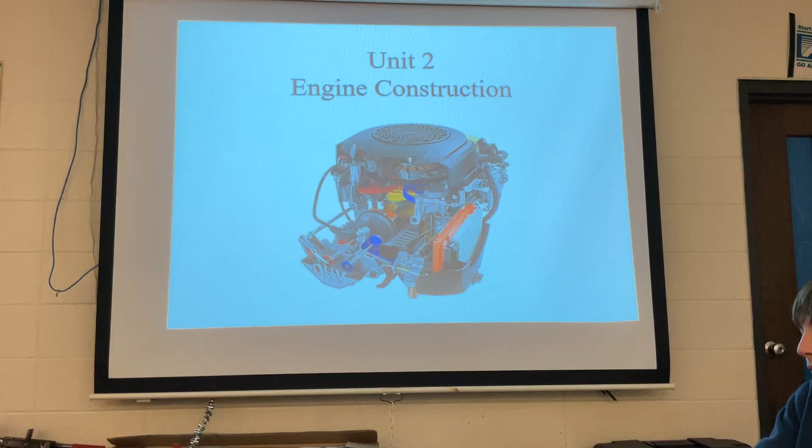You had the picture that looked like this. You're gonna probably have to kind of follow along with me because I'm gonna end up sketching stuff up there, and I'll end up being kind of all over the place. But when you guys had this picture, first and foremost, I try to cover parts and basic motor components. With that, you start to learn terminology.

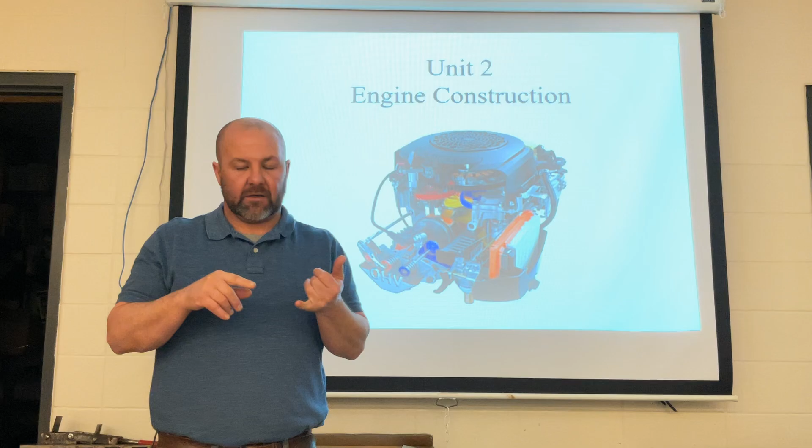Then we jump into tools, and I show you a couple little presentations about tools. There's a quiz on like 30 different tools. Not because I don't think you've ever used them, not because I think you're idiots. Honestly, a lot of it's going to be a review for you. If you've ever turned a wrench, if I told you right now go grab a vice grips, you'd know what you're looking for approximately. If I tell you to grab a Phillips screwdriver versus a flathead, or say something about an Allen wrench, you're gonna know I'm speaking of a hexagon-shaped tool as opposed to some guy named Allen. Got it? Makes sense? A lot of this stuff is going to be review, but that's our baseline to make sure everybody's kind of on the same page.

Yesterday was bad luck, I had to go take my dad, run him back to the hospital. So that's why we didn't go through this yesterday. I fully intended for the stuff to be ready to go for yesterday.

But what you saw here on this sheet is very similar to what I'm going to throw around. You guys keep this, I want to keep one. Get one to William if you would please. This is a PowerPoint that walks through roughly in different looks than what these 14 are, but it kind of gets you along the same line.

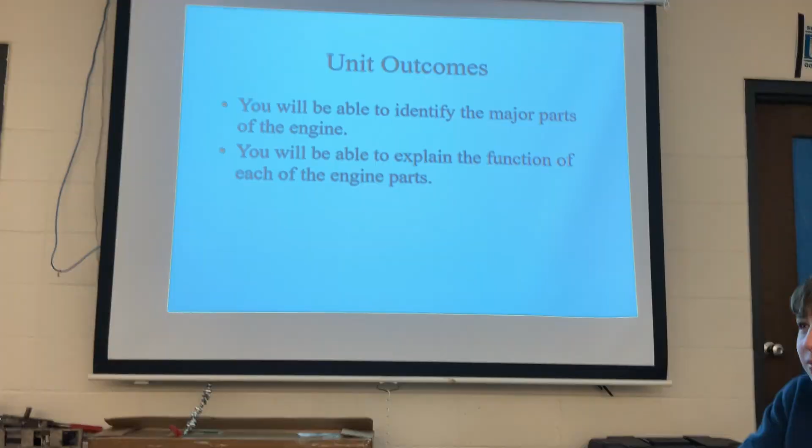I wish that... does Kayla, anybody in the school have a projector? Yes, close up on Kayla. Love it. Do any of the other teachers use the clicker that automatically moves forward? Yeah, people have that. Should ask Mr. Bush for one.

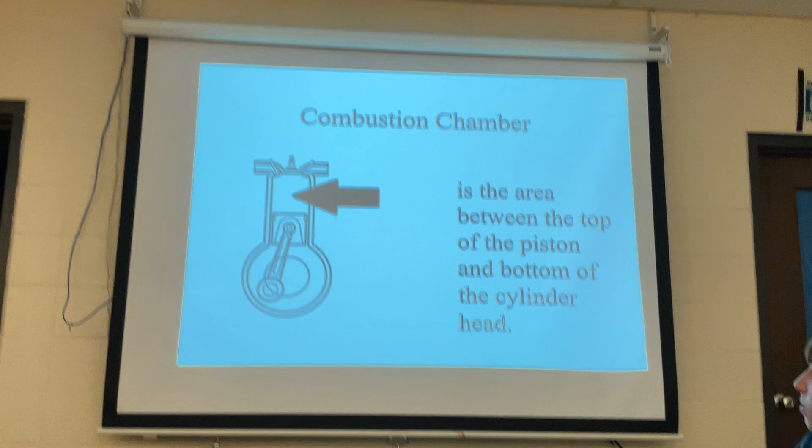When you're done with this, you should be able to kind of identify the major parts of an engine and the functions of some of them. You're not going to get a ton of them. Okay, gentlemen, take a look at that sheet in front of you. That sheet is showing the piston at top dead center. Top dead center. You're going to hear that, and you're going to see this that I'm going to talk about at different junctures throughout the year.

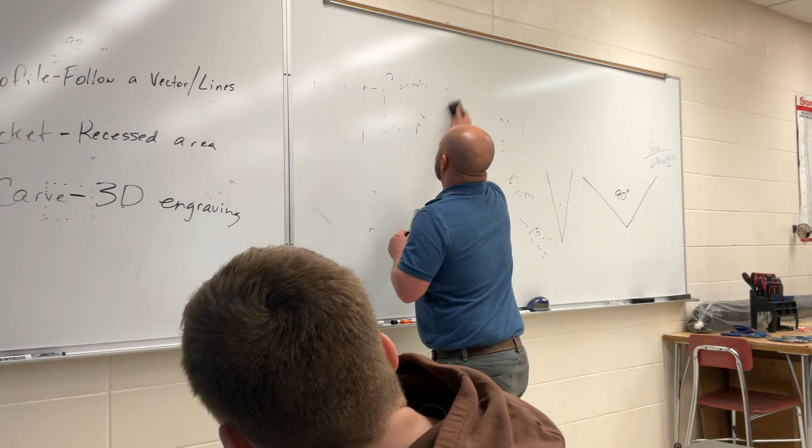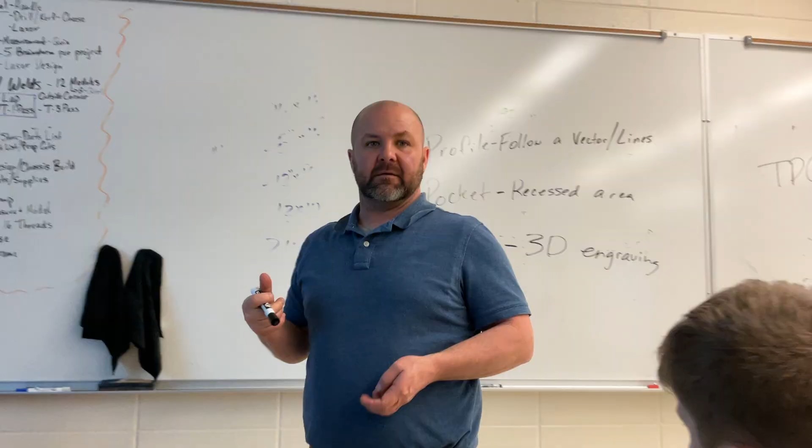But TDC, you ever see that acronym? What do you think that's going to mean? TDC, what do you think that means? Top dead center, top dead center. Good job. Who said it? Kevin, congratulations, nice job.

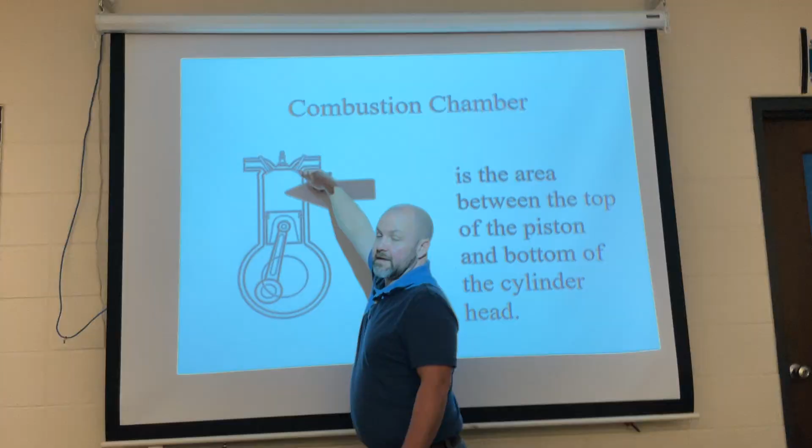That's top dead center. What do you think that one is? Bottom dead center, bottom dead center. Thanks, William. Point being, ladies and gentlemen, that's as low as the piston can go and as high as the piston can go. That's what top dead center and bottom dead center mean.

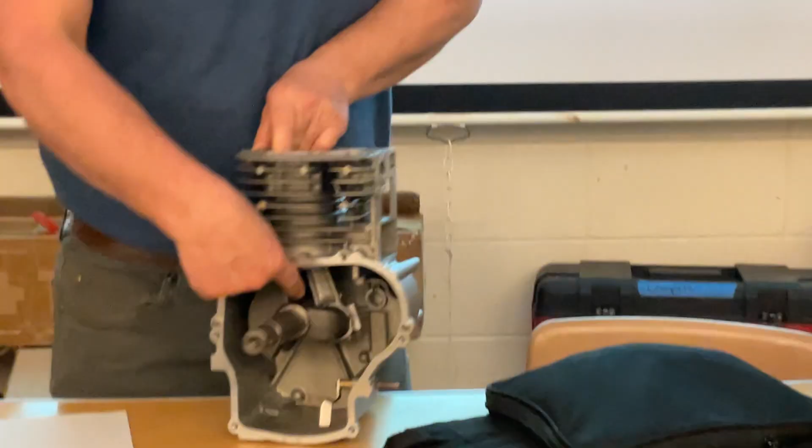Everybody take a look at this. This is a good illustration to kind of show you what's going on. Right now that piston's coming down, and this is called a connecting rod. Let's look at it, here's the connecting rod. That part is the connecting rod. That piston can go up as high as right there, you guys see right there where it reaches as high as it can go. Okay, that's top dead center.

And then when it's all the way down here, actually the easiest way is just when it's in that perfectly vertical position, that would be bottom dead center, as far that way as the piston can go. Which now ties us to, if we look on the sheet, you guys might wanna just make updated notes as I go along. You might wanna grab this sheet, make updated notes as we go. But what is number one? Actually, I think it's in here, I'm not gonna jump ahead yet.

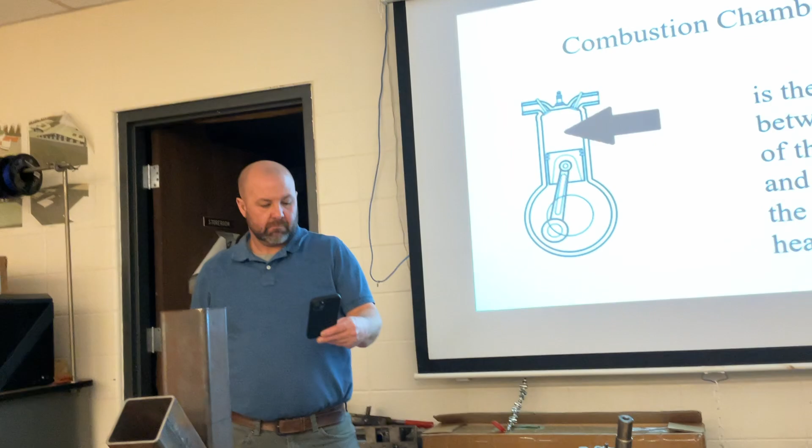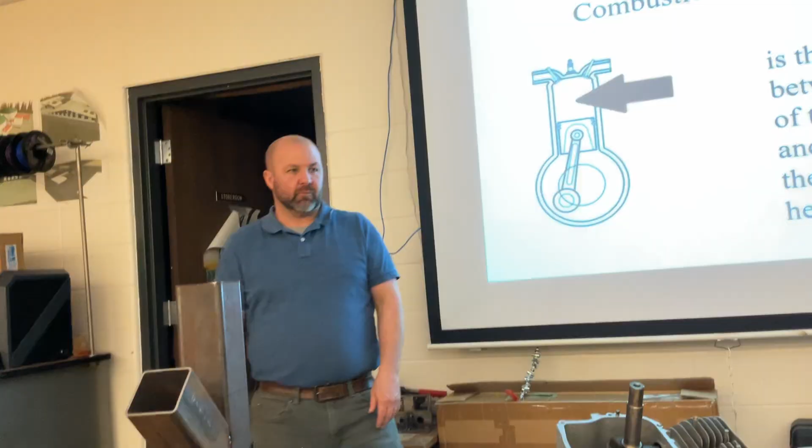Okay, so gentlemen, this isn't on your sheet. Combustion chamber. A combustion chamber, what do you think happens in the combustion chamber? Combustion. Weird, rocket science, right? What's combusting? Burning. Say that again, Kevin. Burning. Exploding. Oh, combustion is burning, right? Okay, when fuel is combusting, that's talking about burning.

There's burning going on in there. So what's in there that burns? Gas. Most of the time I refer to things as fuel, okay, because there could be diesel, there could be propane, there could be gasoline, and then that ties us into mixed gas and unleaded gas, regular gas.

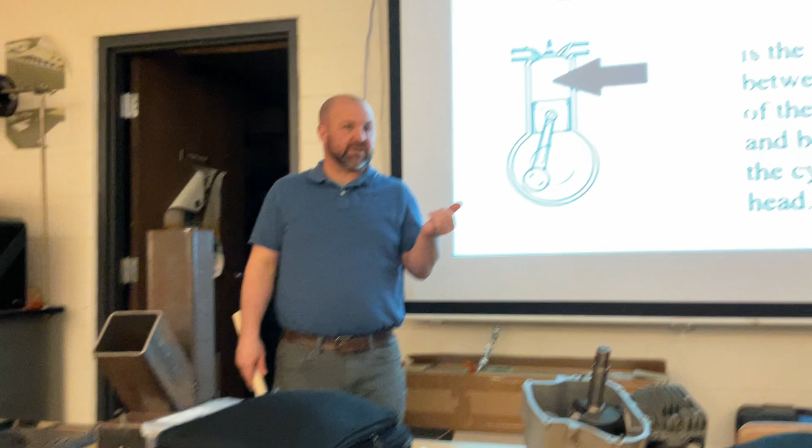We'll talk a little bit about differences, but largely, gentlemen, the premise is the same for almost everything, okay, whether it's diesel, that gets a little squirrely, two-cycle engines where you have to mix your gas, that gets a little squirrely. Most of everything we're talking about, at least for the basic premise, is four-cycle, four-stroke. When you hear somebody say four-cycle, this is a common misconception, people think four-cycle and four-stroke are different, they don't realize those mean the same thing. So if you hear somebody say two-cycle engine oil or a two-stroke engine, those are the same things too.

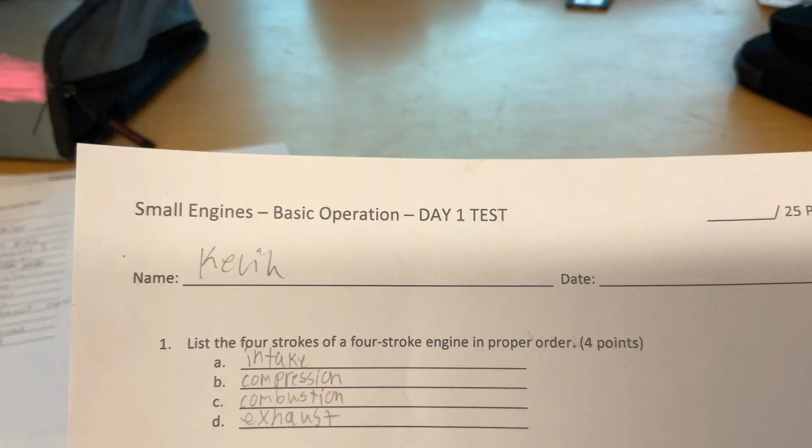Everything we're talking about right now is four strokes though. If you look at the pre-quiz I gave you, your first question is list the four strokes of a four-stroke engine in proper order. We're going to talk about those today or tomorrow. But yeah, combustion chamber, you hit the nail on the head.

Things are combusting. I wanted to talk about what's going to be combusting in there very shortly, but I'm going to move on, otherwise we're going to just talk about the whole thing and leave it on the same slide. Okay, engine blocks.

I told you the other day, this is like number 7 on here, that this could be called a crankcase, this could be called a cylinder block. This entire casting, you guys see this is all one piece, all the way through, it's all one piece. It's not like multiple pieces bolted together. That is one cast piece, and then this gets machined off to tolerances, that gets machined, all these things get machined and drilled and tapped. Makes sense? Fair enough?

So on a small engine, that's all one piece. That's your cylinder block.

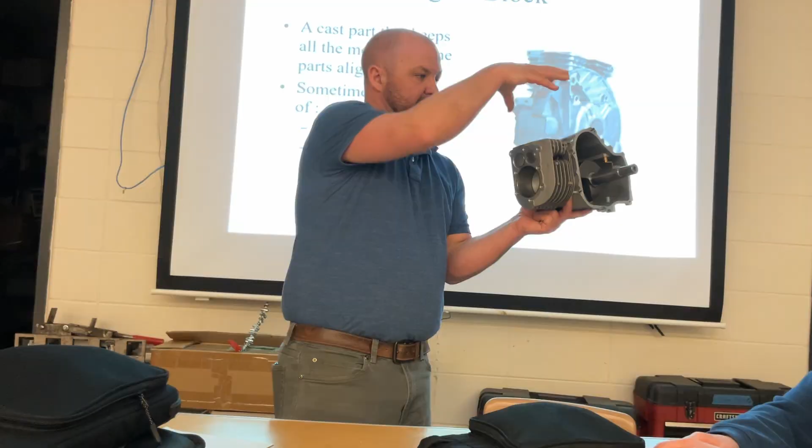When your connecting rod breaks, have you ever heard of an engine throwing a rod? Have you ever heard that term, that it threw a rod? Here's what that means: that means this broke, and usually what it refers to is it blew a hole in the side of this.

Why did you look at somebody? Did it happen to a four-wheeler? Yeah, it happens. Is that something you can order a new part for?

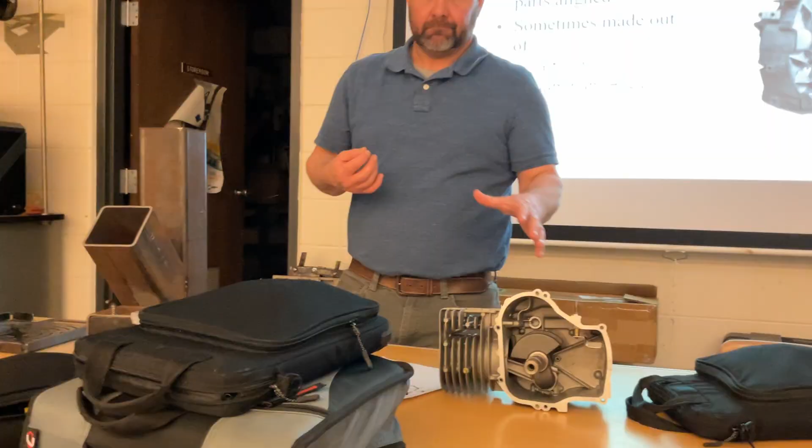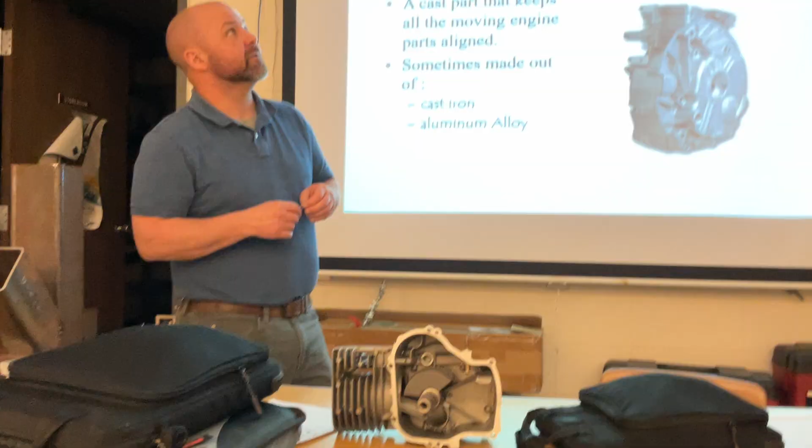Largely not, it's not a part, we're talking about that entire casting. So if that happens to, say, a four-wheeler or a snowmobile, whatever, you're looking at an entirely new engine block, and it may be cost prohibitive to explore your options with that. You may be better off to just buy a new motor. In other instances, you can find ones with other broken parts and pieces, use them as a donor, and then you wind up taking this with your other components and bringing it together.

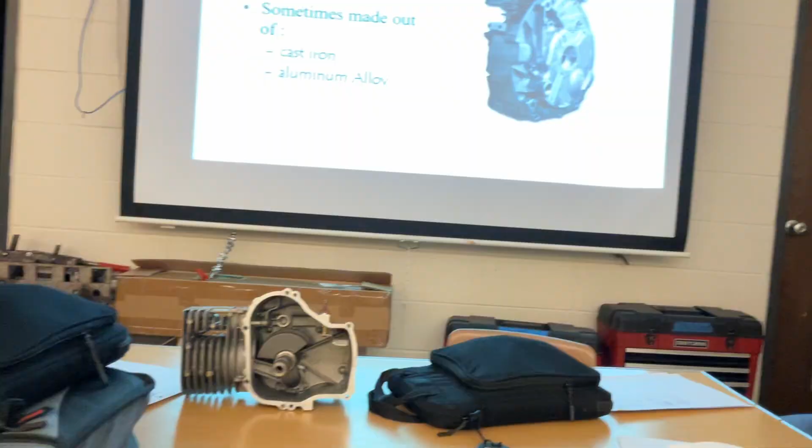But when we talk engine block or, alright, I don't have it on this motor, but the cylinder heads, when we're talking about heads, trying to find...

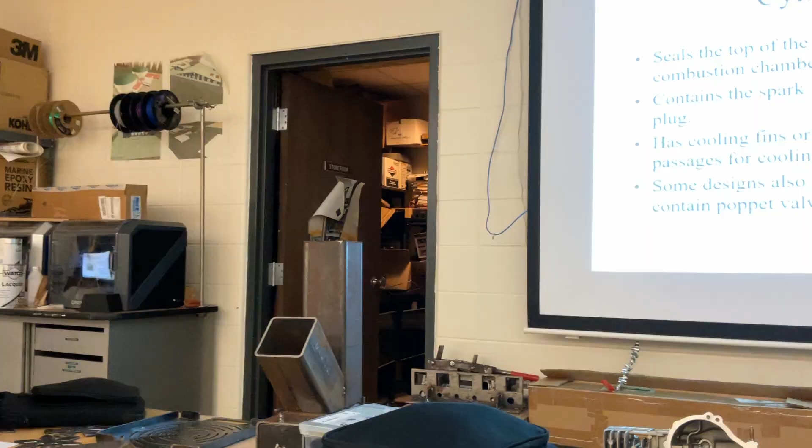Randomly through this, you're going to see me just sneak into this room, steal some things, bring them back, and that's that.

This is what your cylinder head looks like. Okay? Everybody thinks of this motor as operating pretty much like this. Anybody know what this motor is off of? Anybody got any idea? Lawnmower. Tiller? How do you know that? I just guess, the smaller one. He's right, okay, lawnmower, could also be something similar off of this.

Could be a rototiller, definitely, something in that caliber. If this was a rototiller, usually it's going to be mounted such like this. The recoil part where you pull would be over here, and that's this part. That's where the flywheel would attach, is on this taper. And then back here, there would be a pulley that's attached. There should be a keyway on here, see that little teensy keyway? There'd be a pulley that attaches to it.

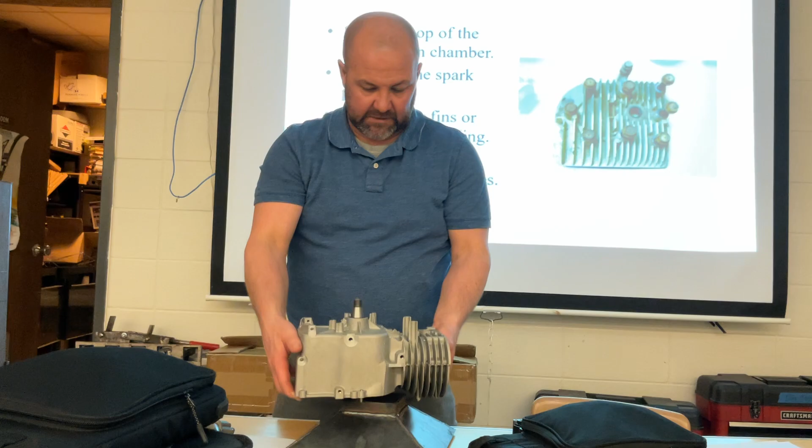And then that'll turn some kind of a belt, okay, so it would operate something in that vicinity if it was on a walk-behind rototiller. But I can tell you this motor is almost exclusively, yeah, it is a walk-behind lawnmower, and it's in this position. Remember what I just told you earlier, top dead center, bottom dead center? Is this now the top and the bottom, when that piston goes that way or this way?

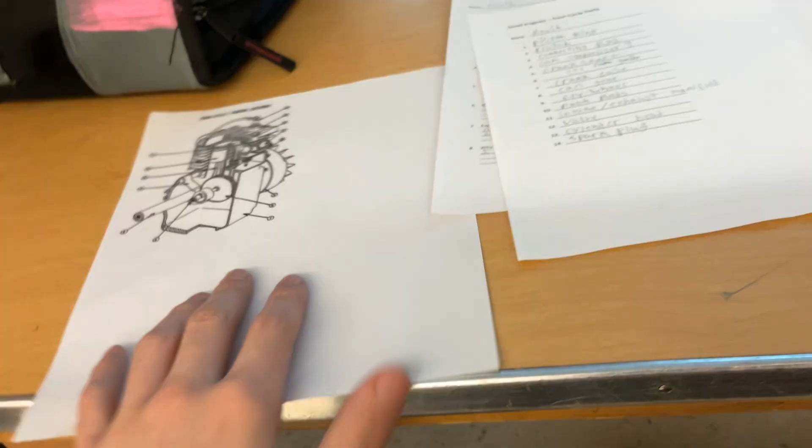It's kind of like right or left, or whatever - I need to stress this. This same motor mounted in this vertical position, or laid on its side, this is still top dead center, this is still bottom dead center. It's just how far the piston goes this way and how far it goes that way.

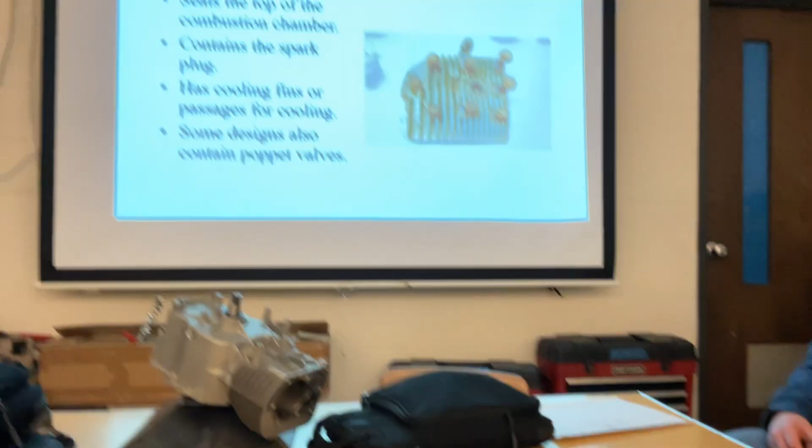Make sense? Questions? Everybody take a look back on the screen. You're going to hear me talk about this throughout the quarter. I know you didn't sign up for a class to sit here getting lectured with PowerPoints. You won't - in about a week or less we'll start wrenching. But we have to go through basic parts and basic tools first, then we start wrenching.

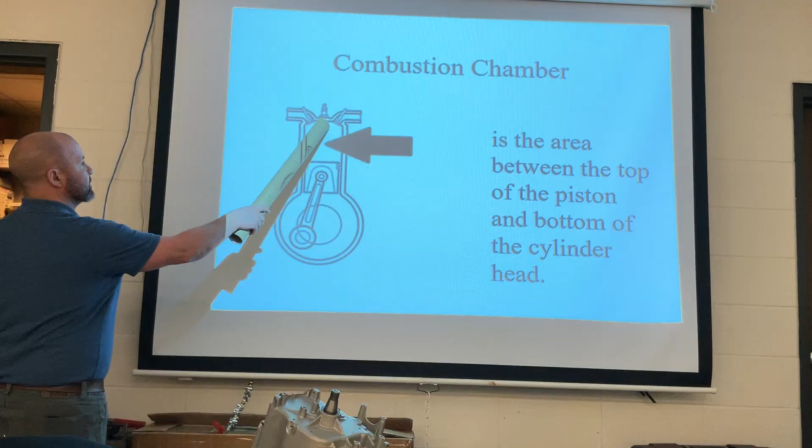What kind of motion is this when the piston goes up and down? That piston is going to go like this again and again and again. What kind of motion is that? Vertical - close, you're close. But imagine it wasn't straight up and down all the time, and sometimes it went horizontal. Circular - opposite of circular. Starts with an L. Linear. Linear motion, okay? This is linear motion.

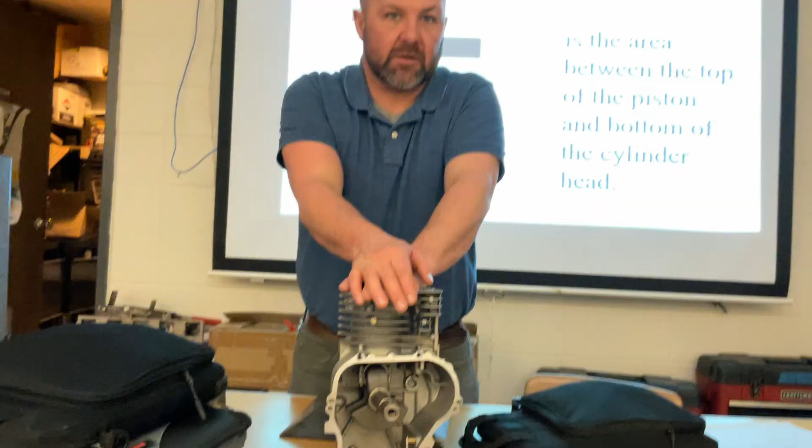Okay, what are we outputting? Gentlemen, this piston is linear - it's going up and down in that cylinder. And it is turning into what? Rotational force? Circular motion, right? That's our output.

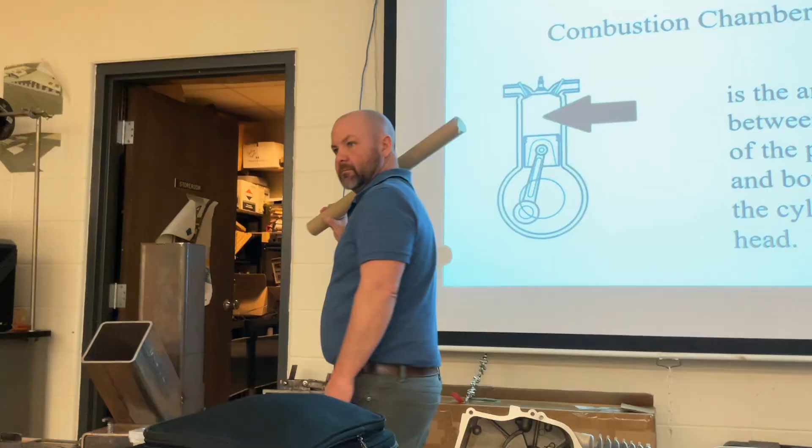Think of a tractor. What powers a tractor? Normally it's circular motion, either turning gears to turn the wheels, or - what's on the back of a tractor? PTO. What does PTO stand for? It's an acronym - power takeoff. And what kind of motion is that? Circular, right? Again and again and again.

So gentlemen, here's a little light bulb moment with mechanics - with mechanisms in the human world, we use a fuel to burn here. What happens when a fuel burns? It combusts, it produces heat, it creates pressure. Why does it create pressure?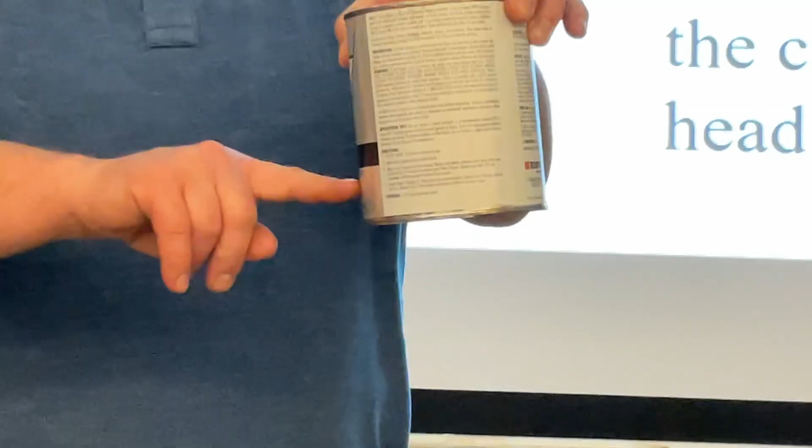I fill this can this far with gas, okay? I pound this lid back on, I have a wick in here. I light the wick and I run. What's gonna happen? Why is it gonna explode? Because of pressure - because the gas needs to escape somewhere. Why? It expands. That's what I need you guys to grasp right now.

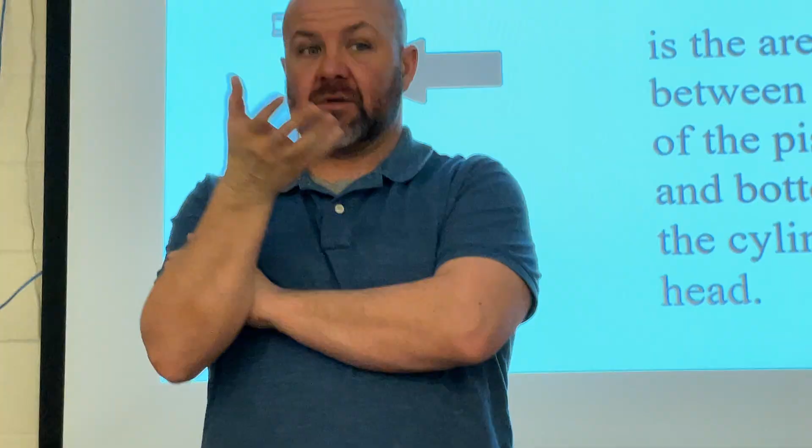It doesn't just magically create pressure, it doesn't just magically explode. I can dump gas on this floor and light it on fire - is it going to go poof? No. Unless you put a crap ton of it. But if you just put a small Dixie cup of gas there and lit it, if it's not contained, it doesn't actually blow up. If you've ever seen fumes travel and burn on the ground, that's what's happening - it's not being contained, so it's not combusting and causing that pressure. It's just combusting in that it's burning.

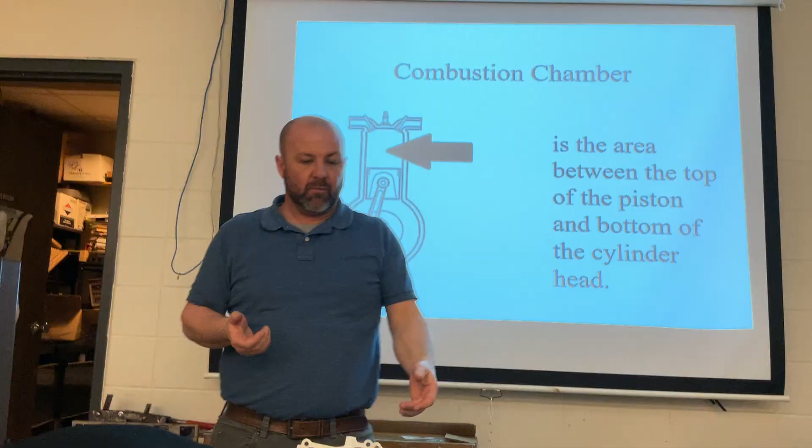Fair enough? Questions? Okay, so what's happening here - a fuel is put in and some kind of spark is put into it. When that spark happens, it combusts and it expands. Is there any more room right now? Okay, right there - what's happening is this piston got all the way to the top. You gotta turn it a little bit because now it's stuck, it's all the way to the top. And then what happens?

Then what happens is that fuel and air ignites. And when that fuel and air ignites, it pushes this down and it goes boom and blows it all the way to the bottom. Make sense? That's what's happening, in a nutshell.

How many times does that happen? Very, very rapidly. If you've ever heard the acronym RPM, what does that mean? Revolutions per minute - so that's talking about how many times in a minute this thing is revolving. We're going to talk about how all this terminology and parts are so interconnected, and I want to cover that early in the course. So that's our combustion chamber - and now we've talked about expansion.

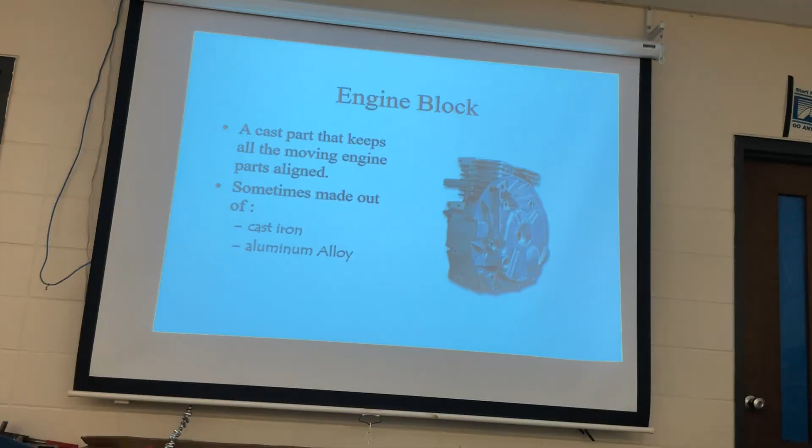Cylinder head is that part up top. It bolts on top, over the cylinder. Okay, what's a spark plug? Spark plug looks like that.

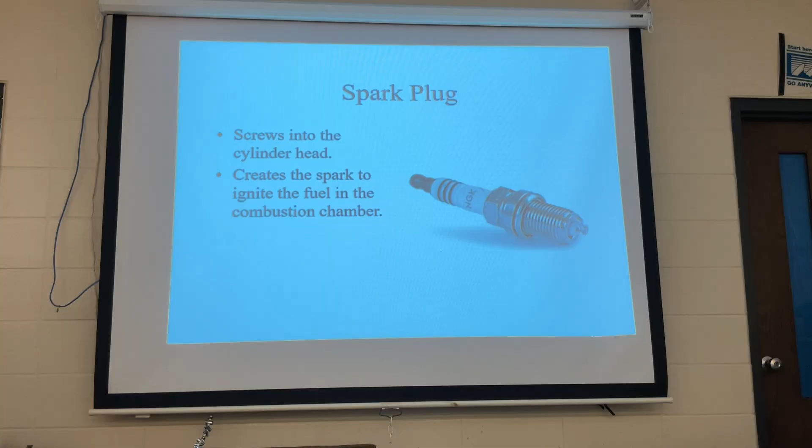Everybody seems to know, I guess I'm not. If you don't know this, that's fine, you're not a bad guy. It's very common sense for a lot of people that a spark plug creates spark to ignite fuel, right? Okay, why else would we have a spark plug? Well, it creates the spark.

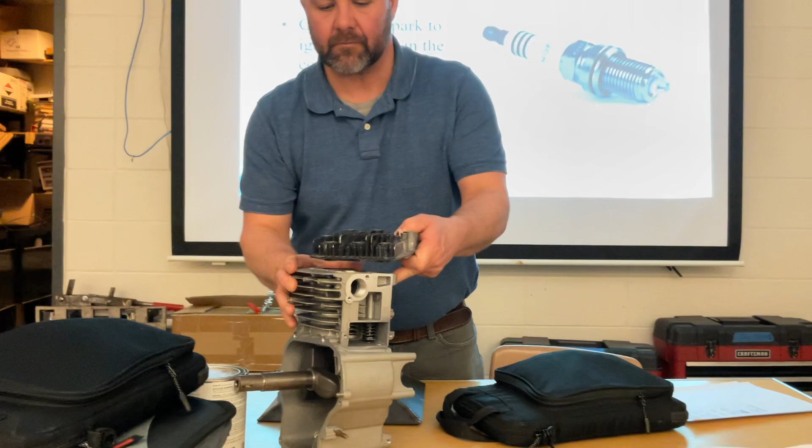So what happens, gentlemen, is this cylinder head goes on here like this. There's a spark plug that goes in this hole in the center. You can see these two cutouts, these are for our valves, and it allows release so the valves can come up and down, raise and lower. This isn't the right cylinder head for this motor, but it's close enough to depict what's going on.

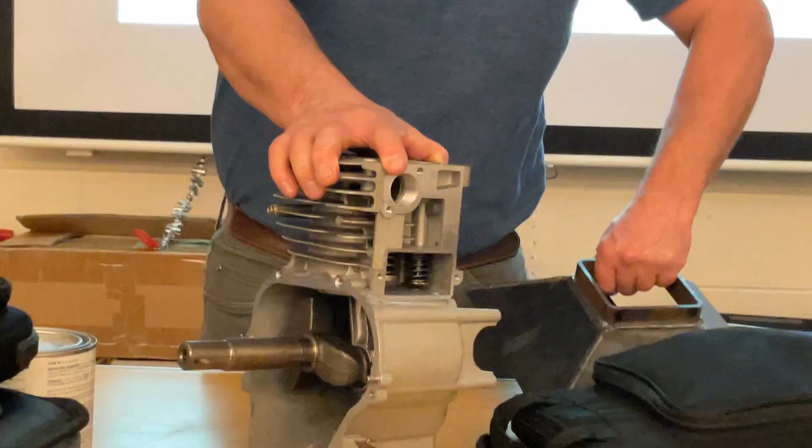So what's going on here is that spark is right there, and these valves... I gotta get where you guys can all see. Maybe we'll scoot that back a little. Okay, I'm gonna point this out for everybody. Can you guys see this port?

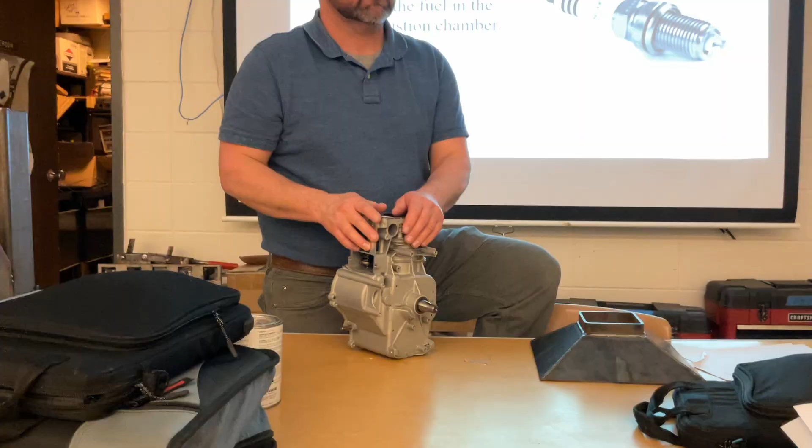This port is connected with this valve, and this port is connected with this valve. So here's how it works. There's two valves. Anybody know what those two valves are? Intake and exhaust, okay? So think about breathing, think about if you had to breathe in just through your nose and breathe out just through your mouth, or vice versa. That's how it works.

I don't know if these valves... no, there's no cam gear. Nothing's gonna work. But as it's going, come here. Can you guys see well enough? So here's what's happening. I'm going to start this thing, okay? I put my choke on.

When I put my choke on, anybody know what the choke does in a carburetor? It limits the amount of air and increases the amount of fuel, so it's richer, you're right. Let me see if I get a carburetor handy. I don't know if I do or not.

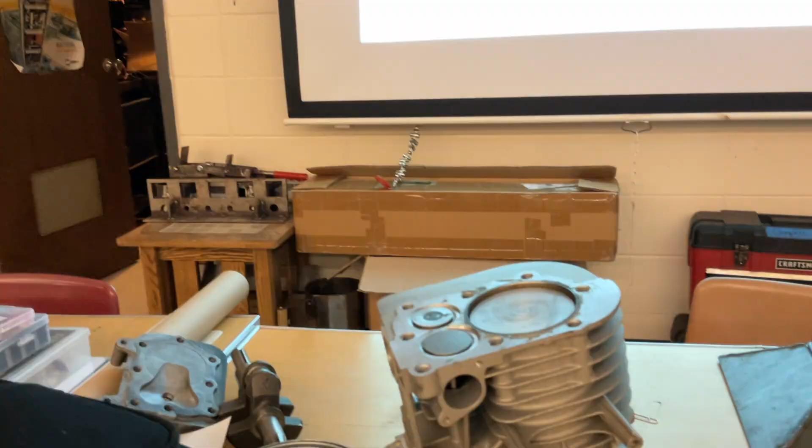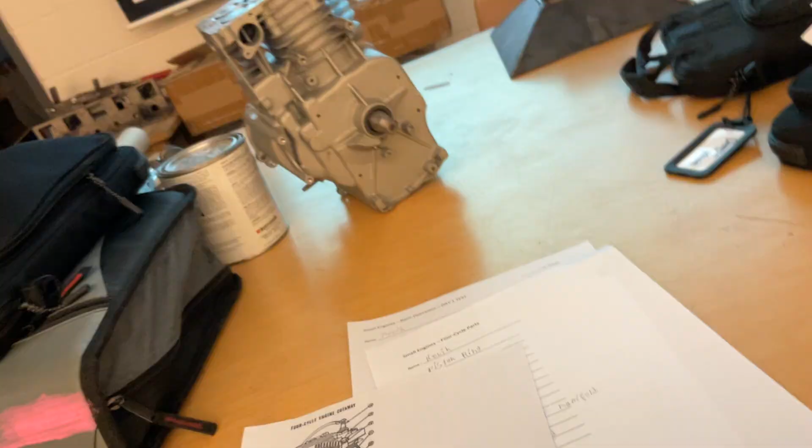We'll jump into it when we get into the carburetors more specifically, but here's what happens. There's three things needed on your... this sheet.

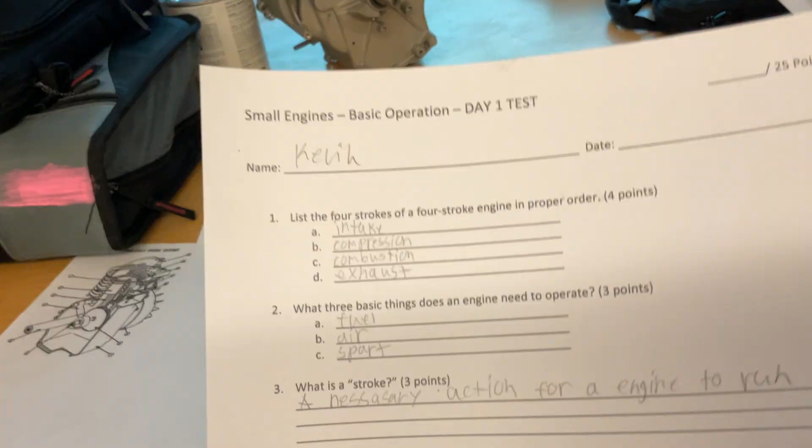Your second question - I said the 4 strokes is the first question. The second question is, what 3 things does it need to run? What 3 things does your motor need to run? You're gonna hear this from me. If today is the first time, you're gonna hear it another 20 times in the next, I don't know, 16 weeks that I have you.

What 3 things does your motor need to run? I don't care if you know it or not, but I want you to try. What do you think it needs to run? Okay, fuel. What else? Spark. It needs something to ignite the fuel. What's the last one? Air. Does it need compression? Does it need all these things? Yes, but these are like the 3 basics, right?

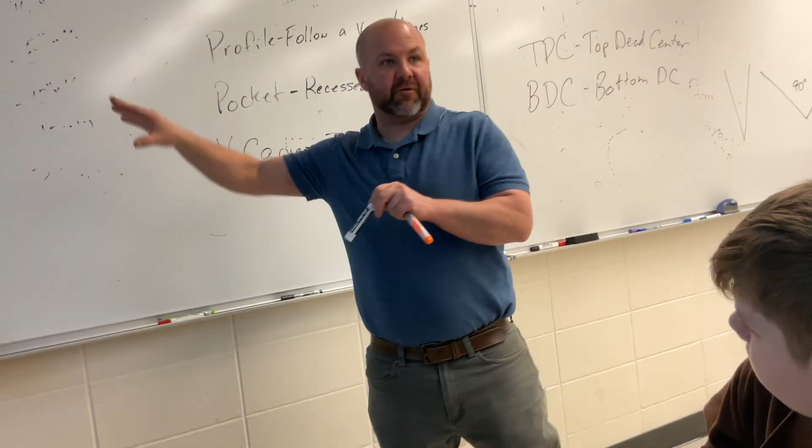If we take out and blow a hole through the side, like if you were to drill a hole into your combustion chamber and it doesn't have compression, then yeah, Reed's absolutely right - then you need compression and all these other things. But those are your 3 cornerstones.

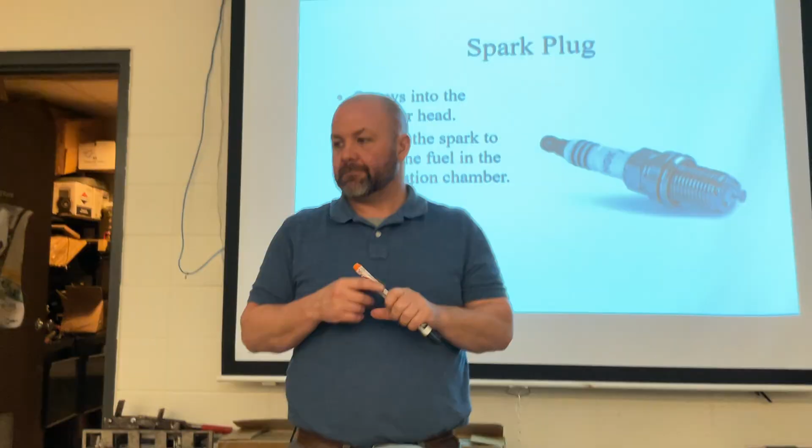Deegan's gonna bring in a motor. He's gonna say, yeah, it worked - I don't know - it worked last October and now we can't get it running. What are we gonna check for? We're gonna check that it gets spark. We're gonna check that it's getting fuel, okay?

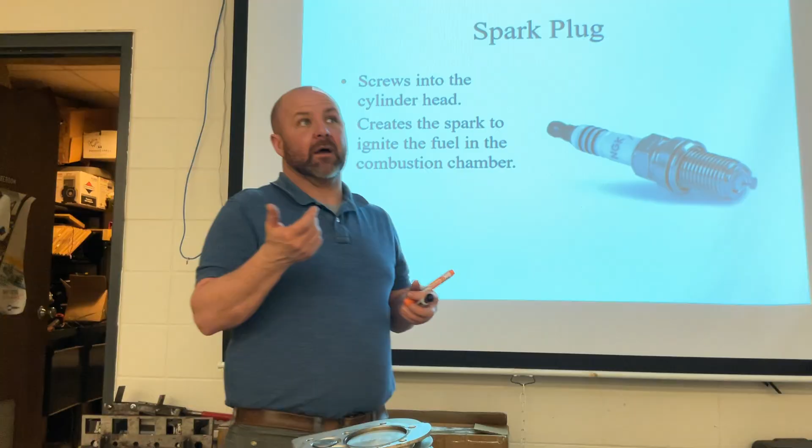Is the fuel filter plugged? Is a line pinched off? Is your gas tank rusted out on the inside? Things like that would cause it to stop feeding fuel. And then lastly, we check your air filter system to make sure there's not a mouse nest or something that would block pulling in air, okay?

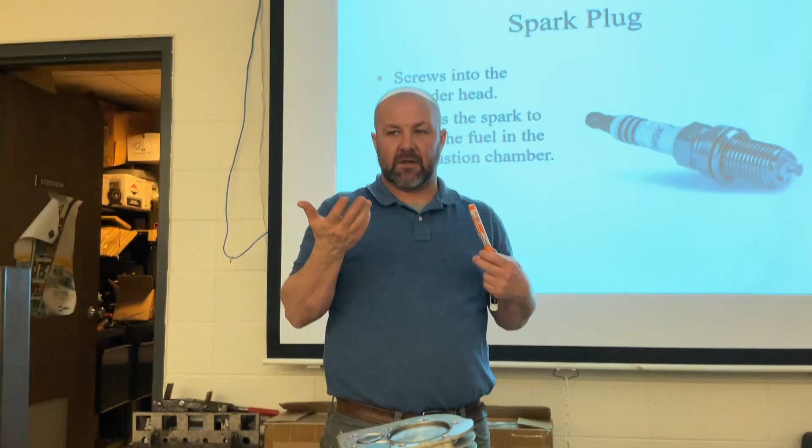Think about it like, you guys remember COVID? Were you guys all alive during COVID? Yeah? How old were you? 4th grade? 3rd grade? What grade were you in? I think I was in 3rd. Do you remember when you went back to school? Remember when we got shut down in March? And then we went back to school the following fall? What grade were you in?

I'm in the 5th grade. Third grade? Okay, so give or take third grade. Some of you are sophomores? So you would have been a fourth-ish.

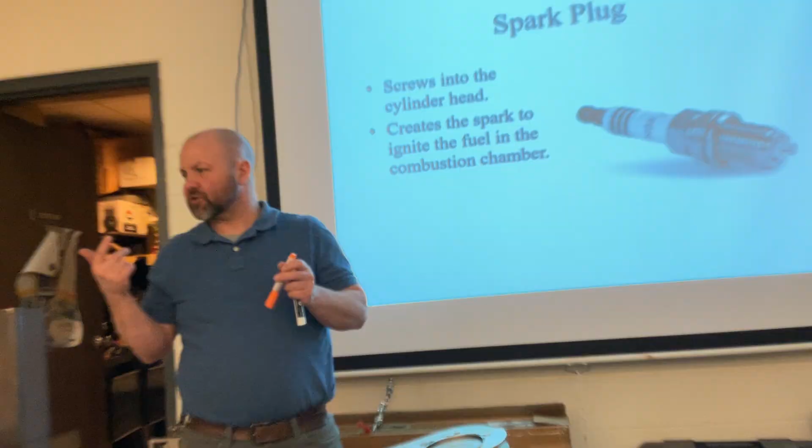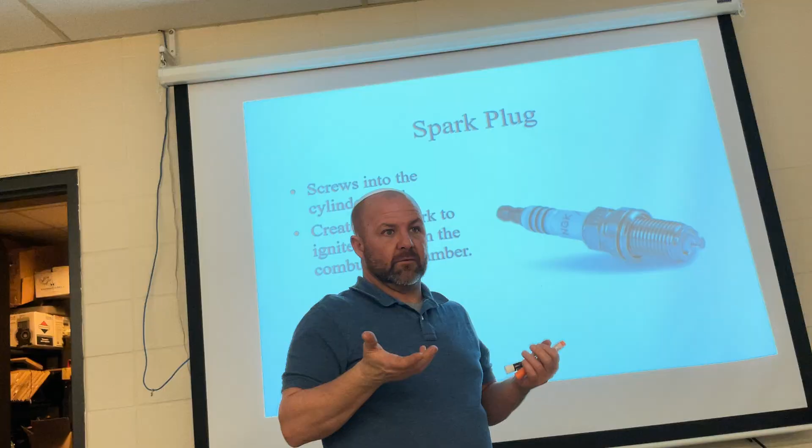Do you remember having to wear those masks in Phys Ed class? Remember running around and getting short of breath faster than before? Next year when we came back, students had to wrestle, play basketball and football with masks on. You physically got less air because you're wearing a mask and breathing through that, right? Same thing can be said for your motors.

If you cover up that air intake, it's not going to run at all or as well, okay? So those are the three things that are needed. Spark plug, we'll talk about when and why it fires at certain times, but in a nutshell it's there to provide spark.

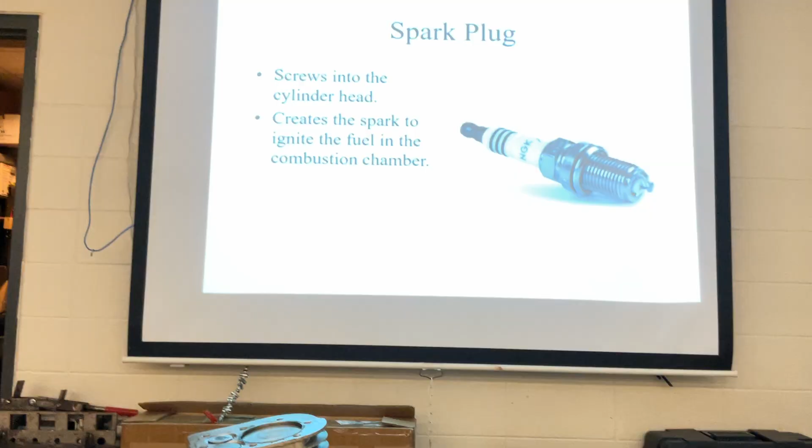Where does that electricity come from to provide that spark? It comes from the battery, right? Come from the battery? Stator or what? It does. It's called a stator or a coil, magneto, depending on which style of motor we're talking about.

That's a misconception I want to dispel right away. Some students think, oh, it's got a battery, like I go out to my car and turn the key, and the battery juice goes to my spark plugs. It doesn't. On a car, the alternator is sending electricity back—actually, the alternator is recharging the battery, it's a little different on cars. But I need you to know it's not electricity from your battery sending over to your spark plug. We'll talk about those later a little more.

Okay, valves. We alluded to valves. This motor, how it works, is when it gets to a certain point, this valve opens up and it sucks air and fuel in this port, it goes up and comes out around this valve. That valve pops up and allows air and fuel to come in here, and it sucks it down.

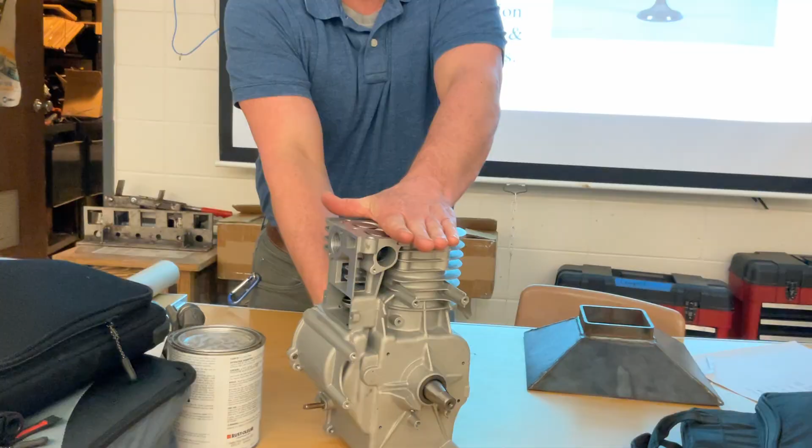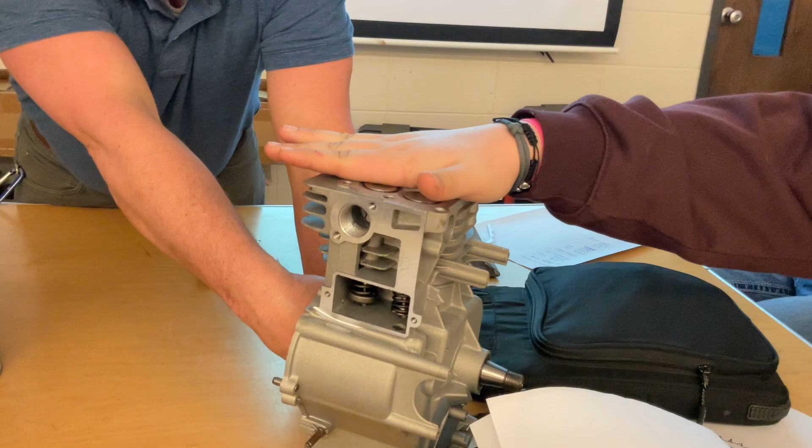So everybody think about this. I want somebody to put their hand tight over the top. You feel that suction? Okay, somebody else, feel that suction? Come on, put your hand on there. Seal it tighter. Did you feel it? You feel the suction? Now I'm pushing back out. Anybody else want to try it? I don't want you to feel left out.

You can see my hand actually physically—I'm not doing this, that's not my muscles, that's the vacuum drawing it down. Why did I go over the top to depict that? Because what's happening is this is all sealed, and when it goes down, it's pulling air and fuel in.

So here's what happens: it gets all the way to the bottom—the piston's way down here—now it's gonna push way back up. Nothing happened, nothing happened, nothing happened, this is the compression stroke. So what do you think we called that first stroke when it went down? Intake. Intake is correct.

Okay, the second one, gentlemen, it was down at the bottom. I pull the recoil, I'm spinning this on my own, this goes back up to the top, just like this. What do you think we call that? It pulled it down and now it's pushing back up like an accordion, pulled apart and back. What do you call it? Compression. Two is compression.

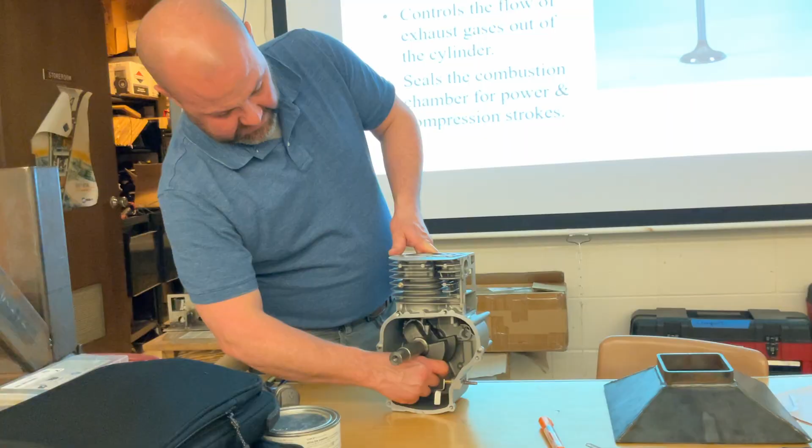Here's what happens, gentlemen—this is the part I've got a graphic on in one of my slideshows. So if you guys can see the piston right about there, from there to about here, it sparks. Just before top dead center, right there, it sparks. But the momentum of this crankshaft spinning brings it to here, it sparks to about there. And what do we call that stroke? It's when it goes from there to there—combustion. Power stroke.

Okay, power stroke, or what I think you were starting to say—combustion. So it's a power stroke or the combustion.

Okay, now gentlemen, piston pushed all the way to the bottom. Now the centrifugal force is going to push it—you guys see these big weights on this crankshaft? If it wasn't for that... okay, I'm getting ahead of myself, getting carried away. It goes right to the bottom, and then pushes back up. What do you think that last stroke is? This valve is actually going to open up and push those gases out of the motor and dispel them. Exhaust is the last one. There's your four strokes.

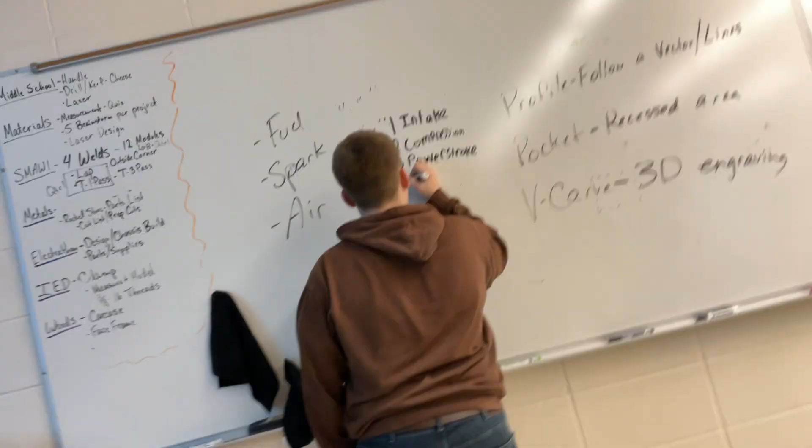Have you guys ever heard a 4-cycle engine run? What do you hear? No, you don't hear boom, boom, boom. You hear pop, pop, pop, pop, right? You give it more fuel and it goes pop, pop, pop, pop faster. You give it less fuel and it goes pop, pop, pop slower, right?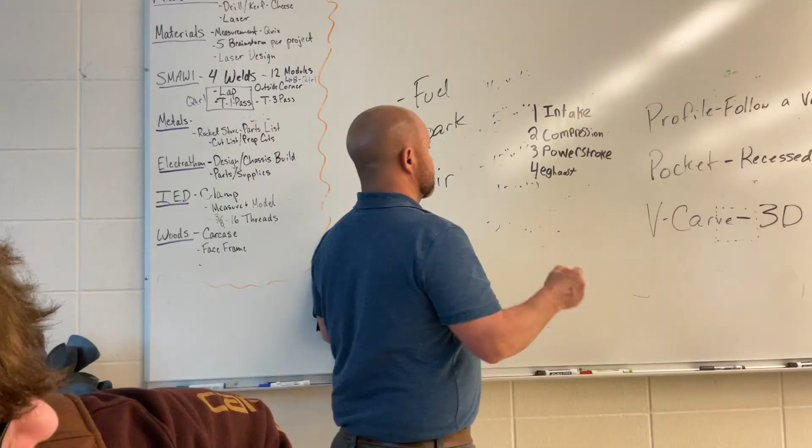Out of these, which one is gas actually burning? Which one is combustion? Only this one. Right there is the only one where we got pow.

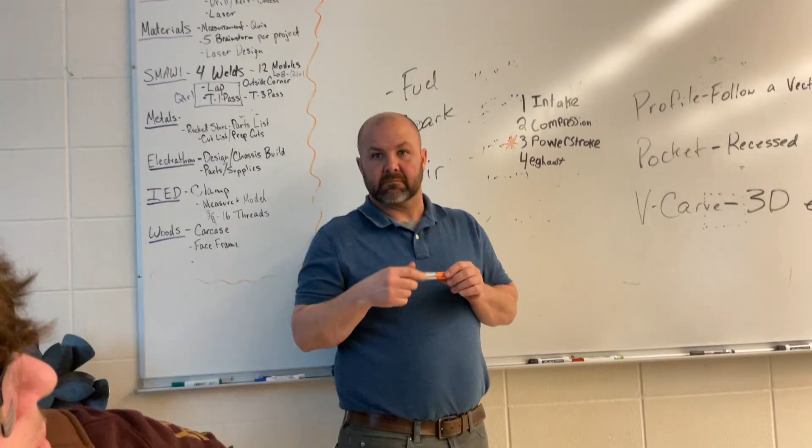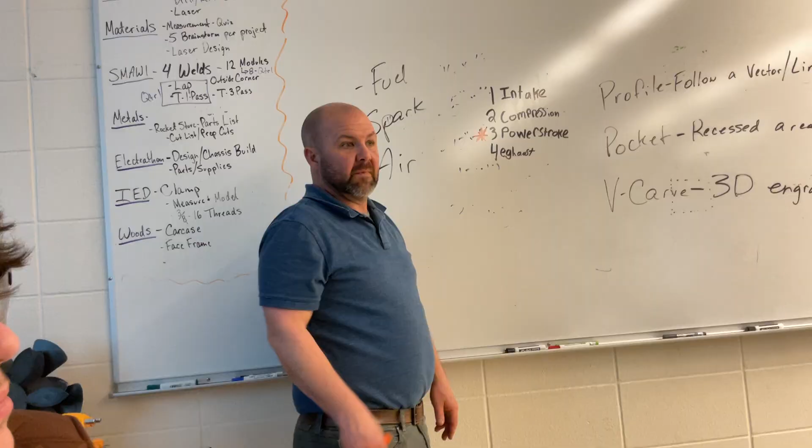How fast is this happening? A lot, very rapidly. This one, every time that piston comes down, it's just pulling fuel in. Every time that piston goes back up, it's just compressing. Right here it goes pow! And then it pushes the gas out. That's what's going on, happening multiple times per second.

You smell what I'm stepping in? So I need you to grasp that's what's going on. And at the end of the day, it really comes down to those three things: fuel, spark, and air that I want to hit on that you need.

What else? Those springs, you can kind of see the springs, we'll talk about those. So, a camshaft gear, or a cam gear.

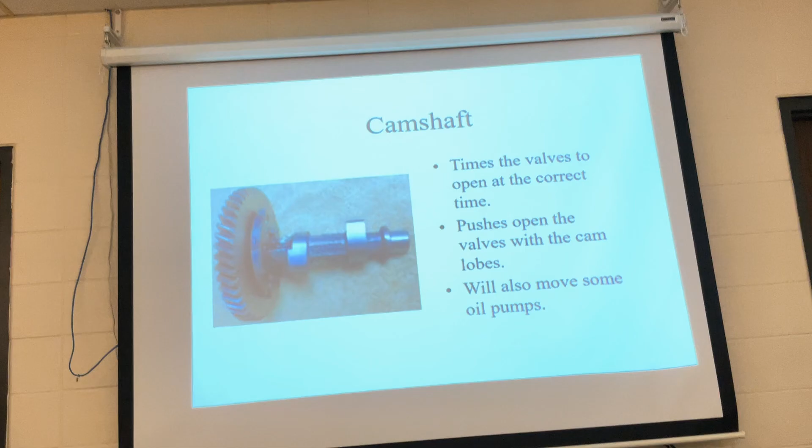I don't have it on that motor in front of you, but they're going to be on the motors that you're going to take apart in a couple days. There's another gear that goes right here, and it actually rides on a gear that would be here. This gear is missing off of this one. Again, that's why this motor is sitting here, it's parts and pieces and random stuff. There's enough random parts and pieces from small engines that I don't know what fits with certain motors anymore, but I keep them as random talking points and talking tools. That cam gear is going to make sense a little more later on. But I want to point this up.

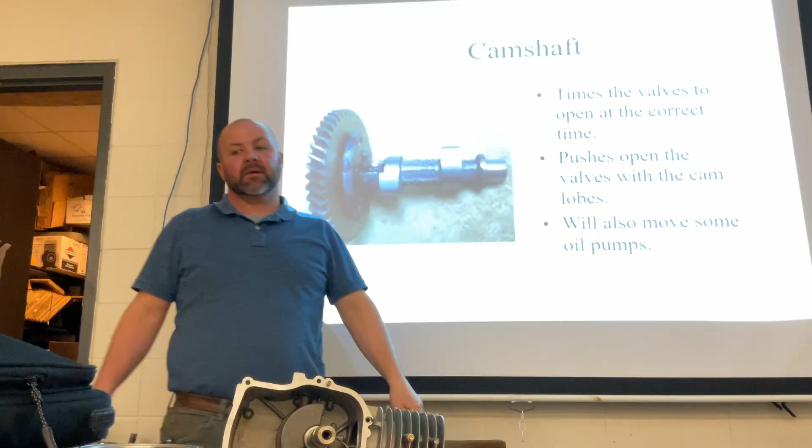This and this - are you guys familiar with what a cam is? You've probably heard this term. Are you familiar with what a wheel is? Yeah. What shape is a wheel? Circle. Make believe that's a perfect circle, okay? Make believe that's a perfect circle.

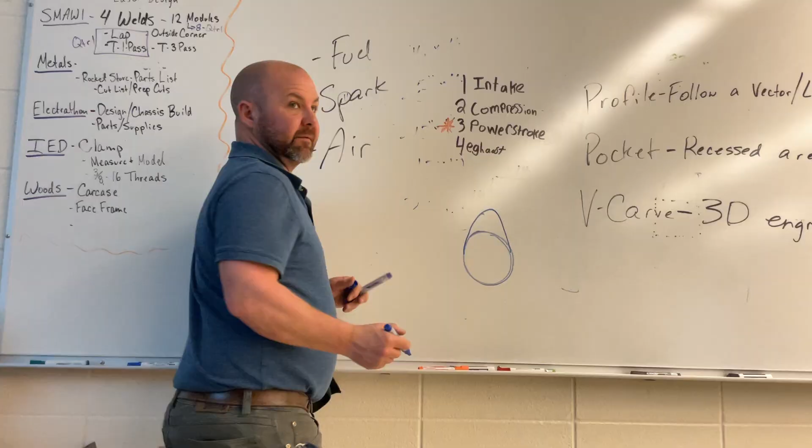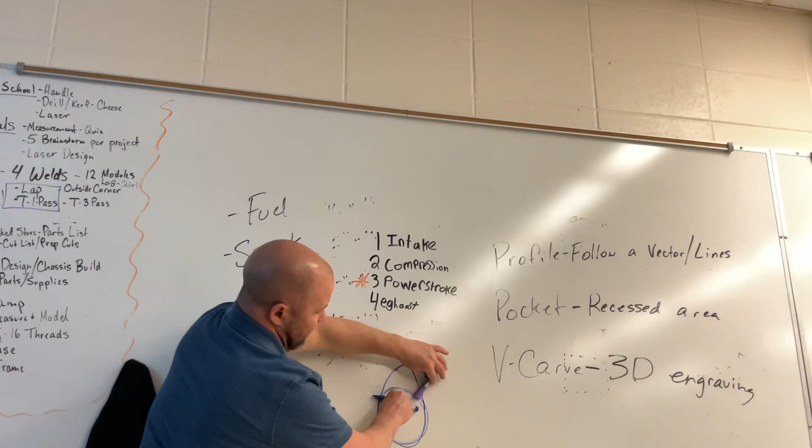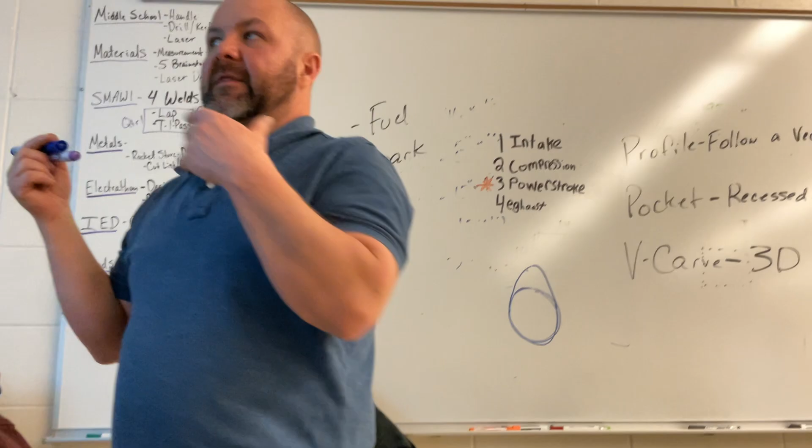A cam is kind of like that, except usually a cam has some kind of a lobe off of it. The way that's designed is that cam revolves. Think of my pen as the end of that lobe, and it's going to spin in a circle. And if there's something sitting on it, it's going to be right there, right there. You see how when I revolve this part, it's going to push up and then back down. Then I go around again and it pushes up and back down. That's what's opening and closing your valves. So this cam gear, camshaft, that whole deal is what's actually raising and lowering your valves.

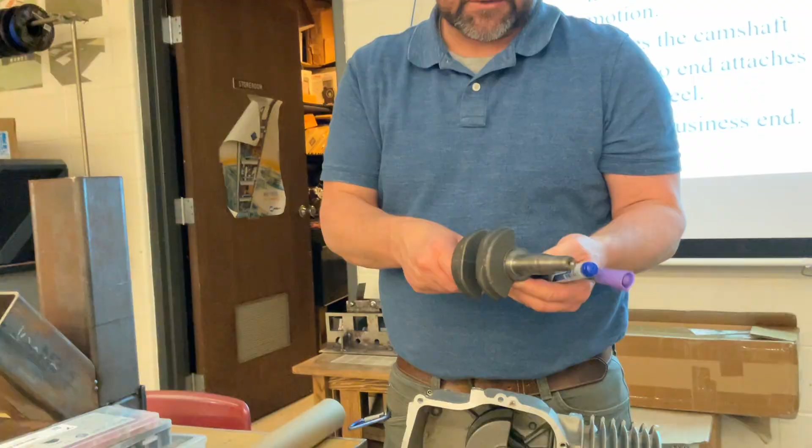Okay, so that's crankshaft. Crankshafts come in many different shapes and sizes. This one is pretty self-explanatory, pretty common for these small engines that we're going to encounter a lot in here. This is off a Briggs & Stratton motor - I only know this because it's got the Briggs & Stratton emblem and a part number on here. Stuff like that. But yeah, pretty run of the mill for a small motor about this size.

As the motors get bigger, you get bigger crankshafts. Crankshaft is kind of like the center nucleus to everything, because that is what your connecting rod - this is the connecting rod again - attaches the piston to the crankshaft. That attaches to the crankshaft, and that again is how we take that linear motion and turn it into circular motion. Then that circular motion is our output.

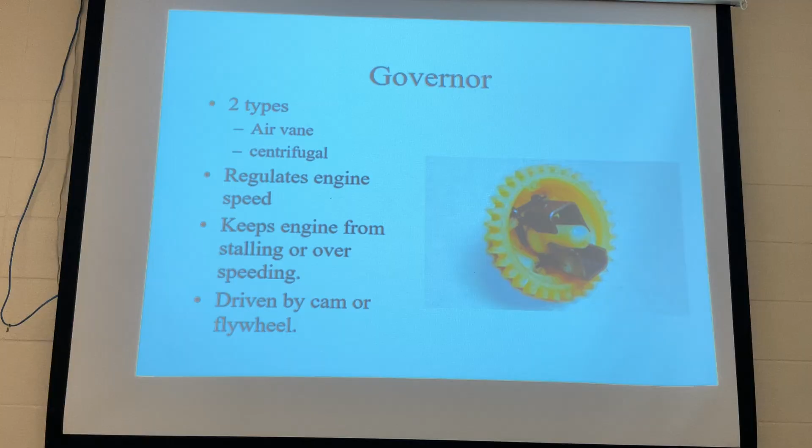Governors are different. They can regulate speed, they can regulate certain different things. But a lot of the time, they're just there to keep your engine from going over what its capacity would be. Go ahead, see ya tomorrow.